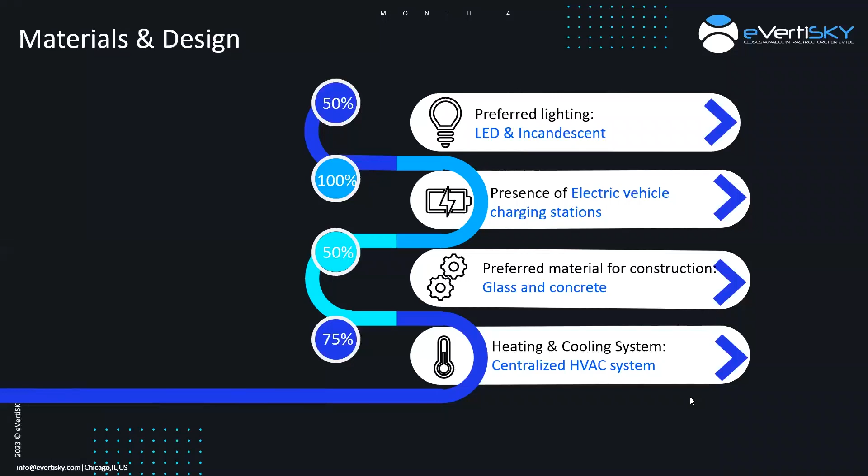And these preferences provide valuable insights for the design team for designing the terminal building and vertiports to meet the needs and expectations of users while aligning with sustainability goals. Next, please. There was also a unanimous agreement on the importance of rainwater capture and reuse systems, emphasizing the commitment to resource conservation and sustainable water management.

And regarding the exterior cladding material, 50% of respondents favored brick, known probably for its durability and aesthetic appeal. And when it comes to amenities, there was an equal preference of 21% for charging stations, restrooms, cafes, or information kiosks, indicating a balanced demand for these facilities.

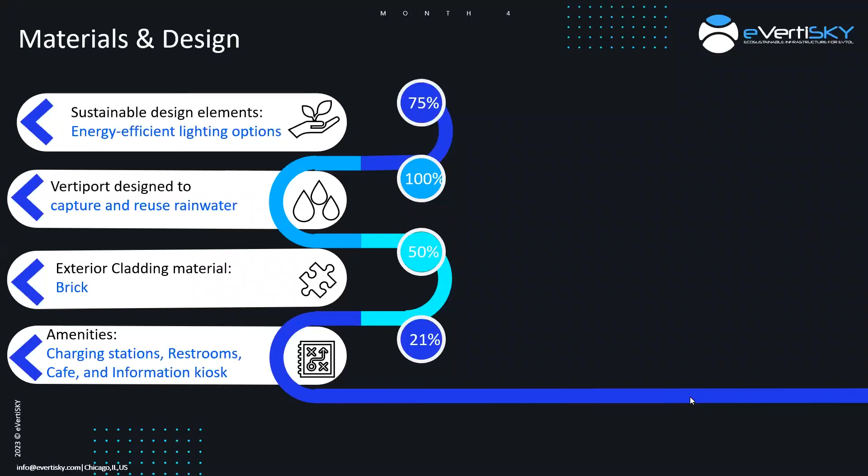And lastly, we have retail shops. The retail shops received a slightly lower preference at 14%, but still represent an interest in offering a diverse range of amenities to enhance the passenger experience. Next, please. Additional key design considerations for the terminal building and vertiports.

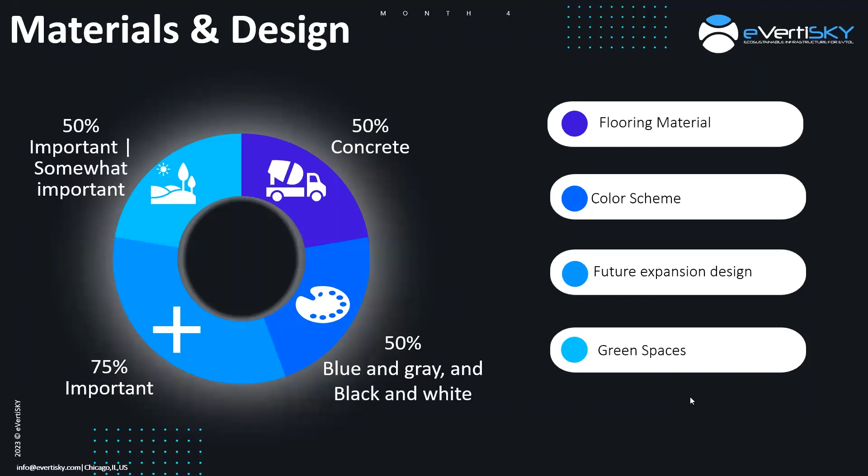We have equal preferences for blue, gray, and black and white color schemes, and this suggests incorporating elements of both for a visually appealing environment. And 75% of respondents emphasize the need for scalable design to accommodate future growth of the vertiport. Stakeholders value the inclusion of green spaces for an enhanced aesthetic and a refreshing ambience as well. And these insights inform the design team. It's really important to keep that in mind. The design team decisions, ensuring a functional, visually appealing and sustainable environment.

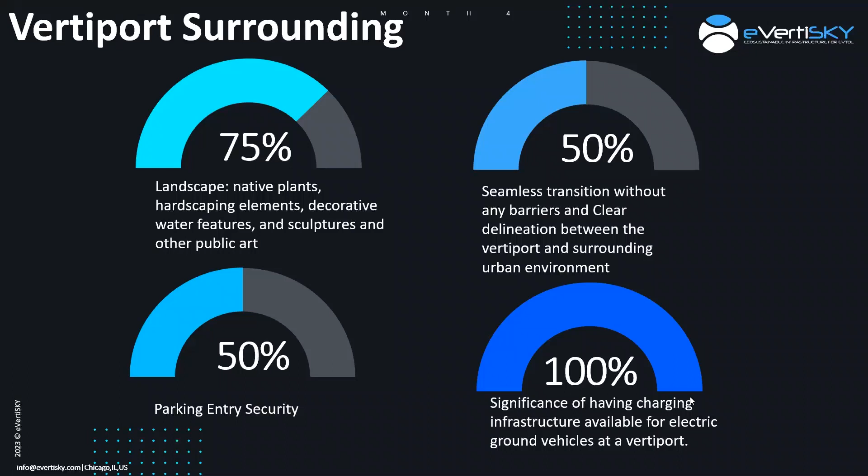In terms of vertiport surroundings, stakeholders emphasize the importance of landscape elements, safety measures in parking areas, and charging infrastructure for electric vehicles in the design of the terminal building and vertiports, and achieving a balance between integrating with the urban environment and ensuring clear boundaries is recommended. And these insights guide the creation of an inviting and secure environment within the vertiport. Next, please.

In terms of security, stakeholders emphasize the importance of comprehensive security measures and specialized infrastructure protections for critical assets within the UAM architecture. And it is recommended to combine security personnel, surveillance cameras, and access control systems to ensure optimal security. And the design consideration should include tailored protective measures for critical infrastructure, sensitive data, and advanced technology systems to ensure their robust security and safeguarding is in place.

And lastly, we have the operators. So stakeholders highlight the importance of providing dedicated space for eVTOL operators to conduct flight simulation and training at the vertiport. And this demonstrates their recognition of the significance of safety and competence in eVTOL operations. The design should include both indoor and outdoor training spaces to accommodate theoretical training, virtual simulation, and practical exercises, ensuring comprehensive training for eVTOL operators and enhancing their capabilities.

We are done with the survey. So I know you all have been waiting for the airspace structure phase. It's complex, but not complicated. So here we go. Today's points are going to give you a complete picture of what a UAM corridor might look like in the selected location.

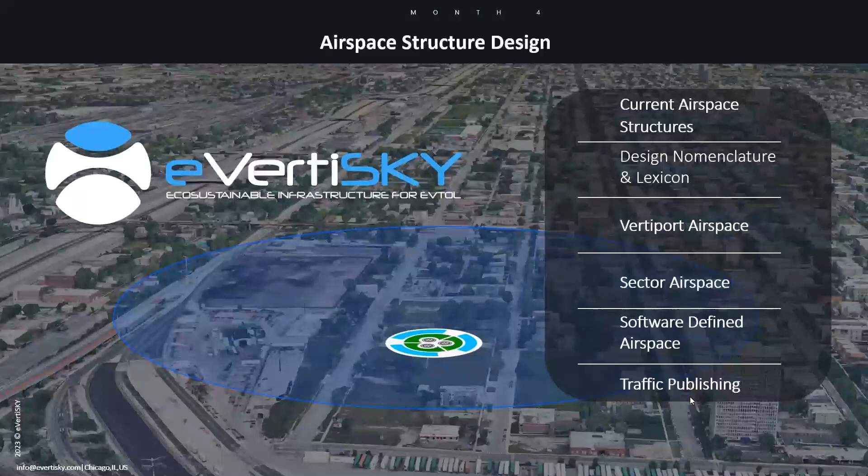So our webinar today centers on the current and future landscape of urban air mobility airspace. We initiate with a comprehension of the various UAM airspace factors, which include aircraft specifications, logistical considerations, and the existing infrastructure's capability with both airspace and ground space integration. Next, we will focus on the prospect of UAM-dedicated airspace. Here, we will touch upon innovative concepts such as vertiports, sectorization, and cutting-edge technologies such as four-dimensional trajectory-based operation and ground-based public sensing node system.

And moving forward, we will spotlight the software-defined airspace platform. This is a specially designed solution that efficiently manages UAM traffic. And following this, we will converse on transitioning towards hyperlocal functional airspace blocks to integrate UAM operations seamlessly. Next, please. So let's get started with the current airspace surveillance gaps.

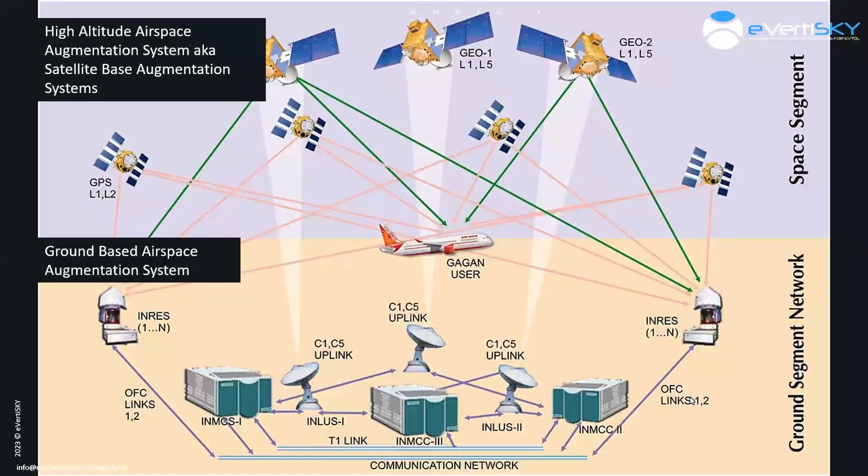So while the high altitude airspace augmentation system and the ground-based airspace augmentation system play significant roles in our current air navigation infrastructure, they present certain challenges when applied to the new dynamic of UAM environments, particularly in managing commercial low-altitude traffic. And existing radar and satellite systems are not optimally designed for the UAM ecosystem, as they present limitations in aircraft surveillance.

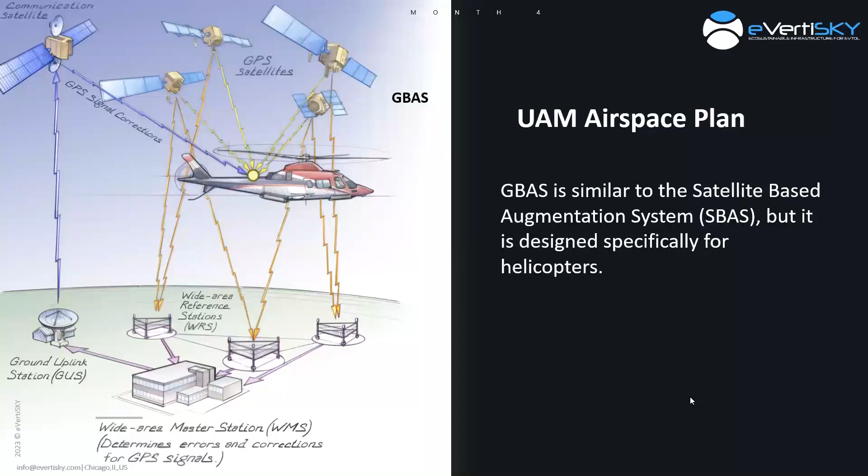So one current consideration is the use of the ground-based airspace augmentation system. So while the ground-based airspace augmentation system is suitable for the diverse flight paths and low altitudes associated with helicopters, it may not fully meet the requirements of UAM traffic surveillance. And here is why.

So in the current commercial aviation framework, flights to and from airports are managed using a combination of air traffic control services and airspace management procedures and technology. While the specific techniques may vary, here's a general overview of the process.

So when an aircraft is ready to depart, it obtains clearance from the ATC tower at the departure airport. As the aircraft ascends, control is transferred from the tower to the appropriate en route ATC facility. And as the aircraft nears its destination airport, it enters the terminal area. And arrival procedures involve coordination between the en route ATC and the ATC tower at the destination point.

Radar systems at the destination airports and ATC facility track the aircraft position and provide continuous surveillance during the approach. And those systems can see an aircraft from 30 to 50 miles away, and that's because of the altitude of the aircraft.

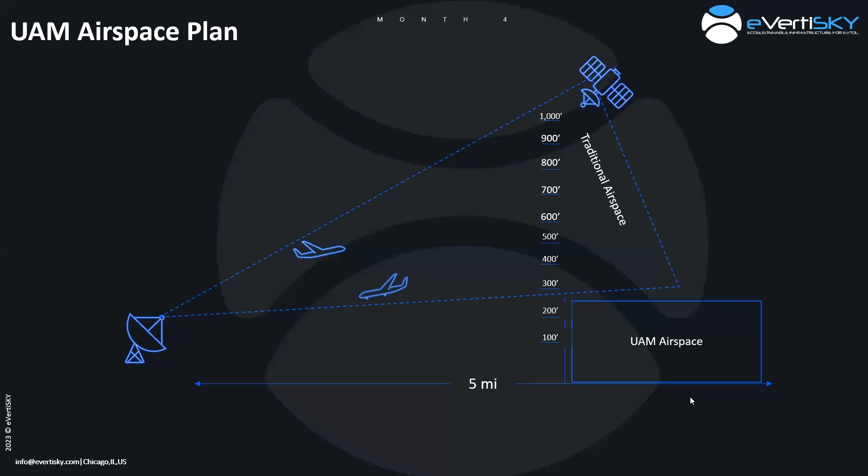Thank you. So in traditional airspace, I can see an aircraft either with my ground-based radar or my airspace satellite, 30, 50 miles away, depending on the placement of that radar. With the UAM ecosystem, it's common for UAS to be prohibited from flying within about 5 miles of the airport.

Now, the reason why those airplanes are seen by those traditional tools has to do with the proximity of those tools and altitude. So if I can remain in an altitude within the zone of sight of those tools, I can be seen. With a UAM aircraft, the closer I get to the airport, the lower I'm going to fly, and that's not the same as flying into an airport.

But if there is a delivery to be made, or a passenger or a cargo transit within the controlled airport, the UAM aircraft will be beneath that airspace. And let me show you what I mean. So you have the facility map, which shows no flight zones for urban air mobility. Let's call it drone vehicles at this point. It's 400. And as you get closer to the airport, the drone altitude has to decrease.

So the FAA recommended a hockey puck type structure around the drone, roughly 250 feet above vertical airspace between manned vehicles. And depending on the UAM aircraft altitude, this will create a 500 feet tall hockey puck. And also 2,000 feet between the aircraft, so tip to tail. So through that zone, you have that much of a buffer.

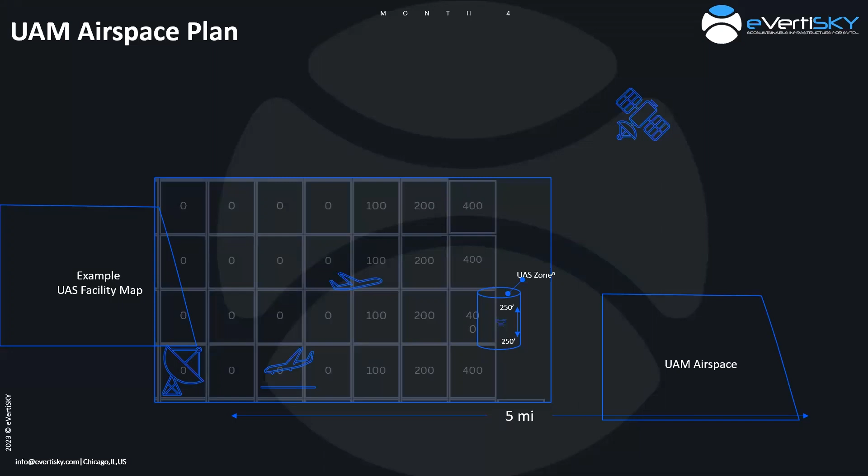So there is a real issue with regards to the current system's ability to see and surveil aircraft, and that's the real component of safety that we depend upon in traditional aviation and airspace.

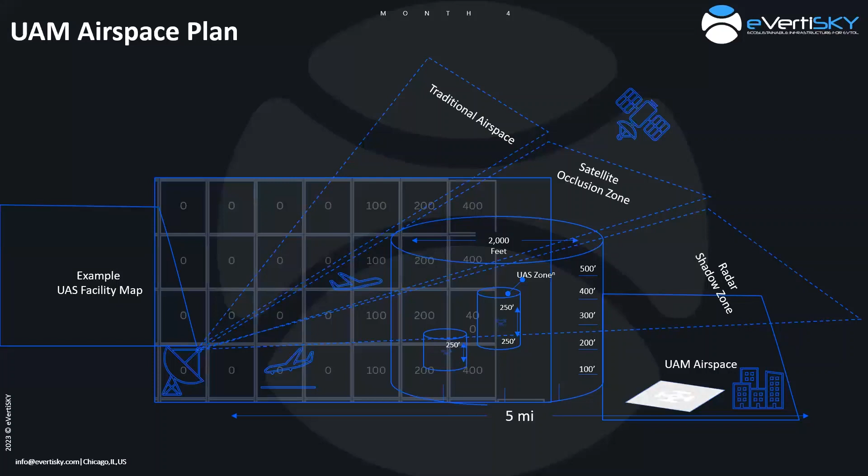So let's talk about these issues. We looked at them for years, and the NASA Dallas-Fort Worth use case with Joby really fleshed out a number of different points. We rooted them in these 6 points here, and they're all based on radar and satellite concerns. These concerns form a set of fundamental shortcomings that are primarily linked to the low altitude and shorter flight routes characteristic of urban air mobility.

The root problem emanates from the inability to establish or maintain initial radar identification within the ATC system, leading to a loss of sight of UAM vehicles. So in essence, UAM exposes substantial operational safety gaps in airspace over cities. And as we envision denser flights and increased aircraft volume in the future, these challenges are expected to become more pronounced.

So firstly, we address the issue of radar shadow, and this pertains to regions of airspace that radar cannot detect, creating a blind zone that aircraft could potentially exploit. And maintaining visibility and control over UAM vehicles becomes a challenge due to these radar shadow zones, intensifying the complexity of UAM traffic management.

And secondly, we face the impracticality of the traditional radar separation requirements in the UAM context. The conventional standard of 1.5 miles lateral or 500 feet vertical separation for departing or arriving flows doesn't accommodate the unique low altitude and granular nature of UAM flights. And this makes the current separation protocol less suitable for UAM operation.

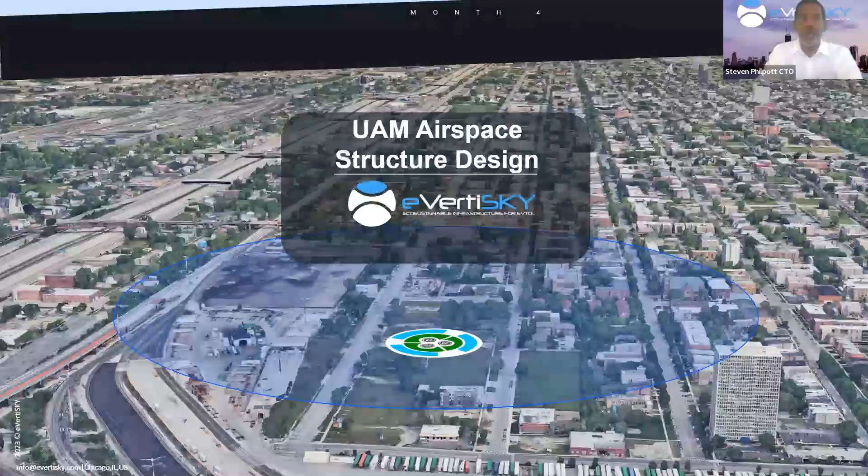What we wanted to do was be able to capture these types of data points in our design and then digitize them for a new approach. In doing that, we decided to develop the nomenclature, which is essentially the definitions for all of the places and things and activities that will occur within a UAM airspace structure.

In the context of software-defined airspace, which is our own approach, we're looking to use the nomenclature as a system of naming and terminology to standardize the various components of a software-defined airspace unit and those entities and concepts within the framework.

So what we have is essentially vertiport airspace structure definitions, the actual airspace structure sector, the broader sector in which it sits, the corridor structure, so that's basically how to get in and out of those software-defined airspace structures, and the route types. What are those route types going to be? And the zone types, along with what we're looking for to encourage deconfliction and traffic management. And then we look at the broader area in which those aircraft are going to be traversing.

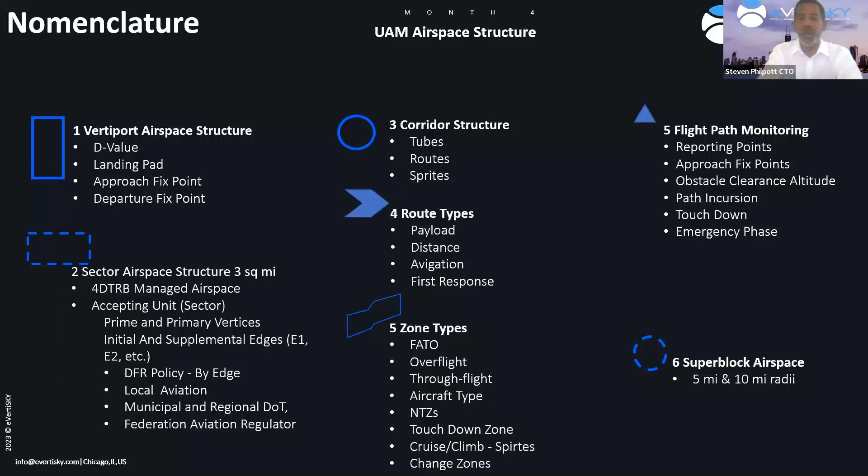We also look at developing a lexicon. Let's call the lexicon the base of knowledge of relevant objects that refer to the object's characteristics. Each one of these are essentially placeholders for the identifiers and characteristics of those objects. The goal is to provide a standard lexicon to grow with the robustness of the UAM industry and provide a reference for that growth over time.

Within our approach, we define the lexicon to capture information like the sector layers themselves, the digital twin of that sector in which we fly, the digital rules of flight within that sector, and publishing of that information to the relevant tenants of that UAM ecosystem.

So let's talk a little bit more about the actual urban airspace. Just to take a step back, everything that Sandra said mentions that the existing traditional airspace system is going to have a hard time being retrofitted to accommodate the new type of vehicle.

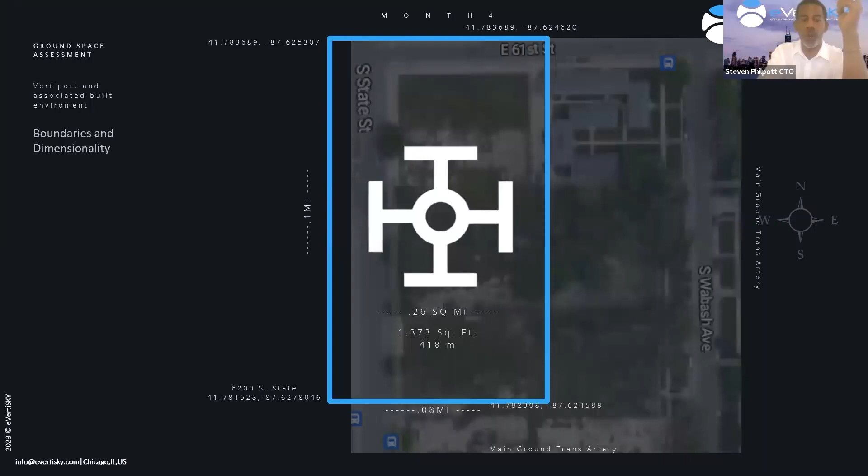So let's talk about our proposed location. We're at 6200 South State in Chicago. We captured a bunch of information to determine where that location is and what our route capabilities were, as well as the actual sizing of the vertiport. For that vertiport size, we took into account the dimensions of the vertiport itself, but we want to establish what we call the D value. That's essentially the airspace that is significant to the operations around the airport, the boundaries and dimensionality of that vertiport.

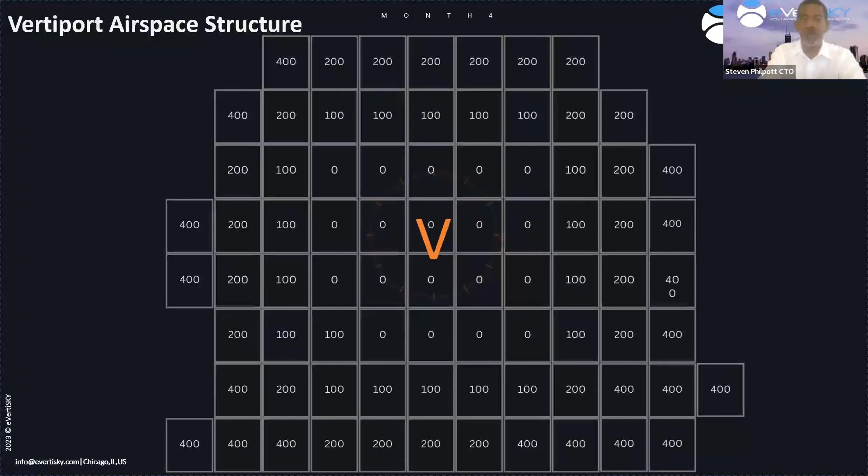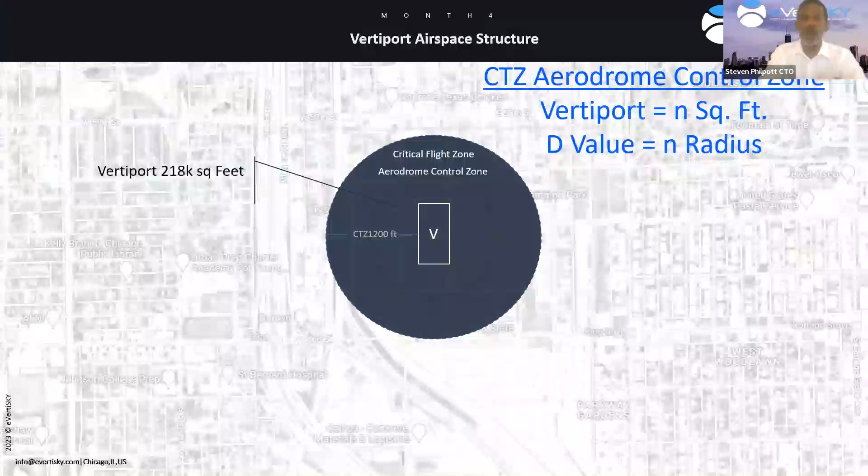And so we have taken the same approach of using a UAS facility map to step out the altitudes, the maximum altitudes of aircraft entering those zones, to provide that basic standard of protection. Then we drew a circle around the vertiport to define that maximum area. We're going to call that the critical flight zone, or the aerodrome control zone. It's our vertiport's sensitive flight zone. We're going to say, for example, that is 1,200 feet. There are no obstacles. There is clearance from the vertiport out to 1,200 feet.

And then we look at that sensitive zone around that. That is the exiting of the critical flight zone of that vertiport into the Class B airspace. It may be beneath it. It may be entering into that airspace. But we want to define that area as the D value of that sensitive space to get the vertiport's true D value of about 1 mile.

We also want to look at various angles of approach to get in and out of that critical airspace and the sensitive airspace. It's a little wider on airports because of the flight characteristics of the manned aircraft. Since all of our aircraft will be vertical takeoff, we looked at the best possible and most efficient way to enter and exit those zones.

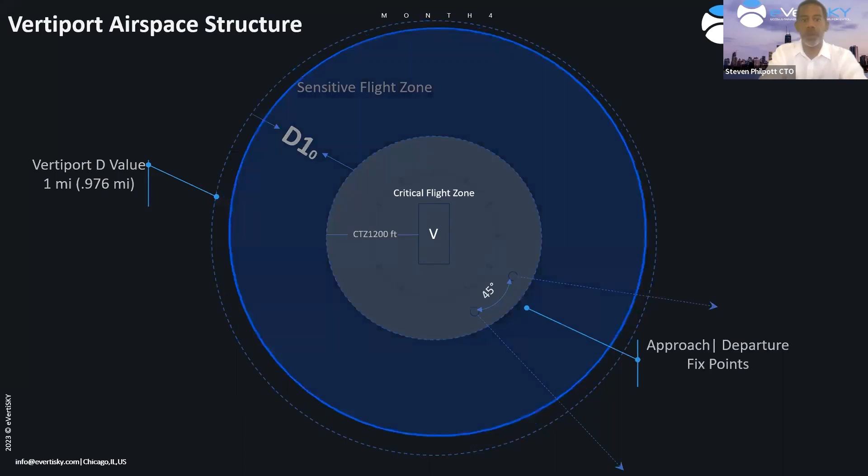In traditional airspace, there are fix points. An approach fix point is a designated location on the ground, if you will, used by the pilots to initiate a final approach. So you've got approach fix points that are typically a few miles from an airport and designated on your aeronautical chart by a symbol.

And then of those type of points, obviously you've got initial approach fix point, then you got a final approach fix point. Let's say that initial approach fix point is outside, just entering the sensitive zone, where that final approach fix point is that area where you're actually coming into the critical flight zone. And this would be the point in which a pilot or the operator would encounter communication with the traffic management system to acknowledge their position and indicate their final approach and descent into that landing area.

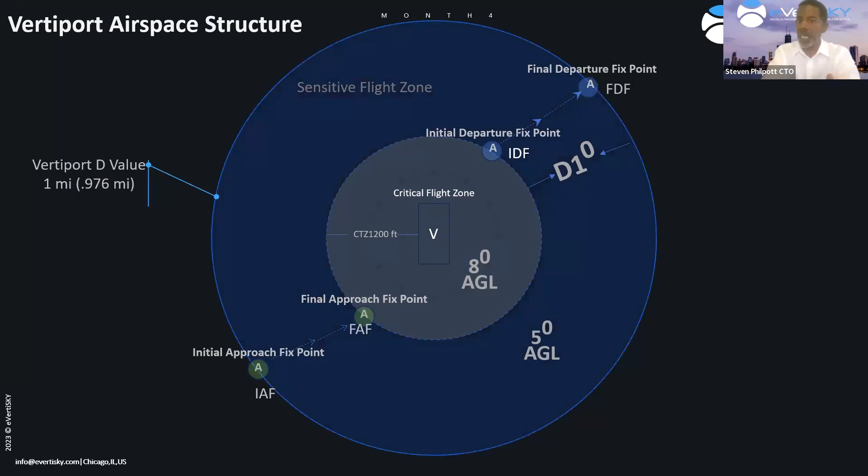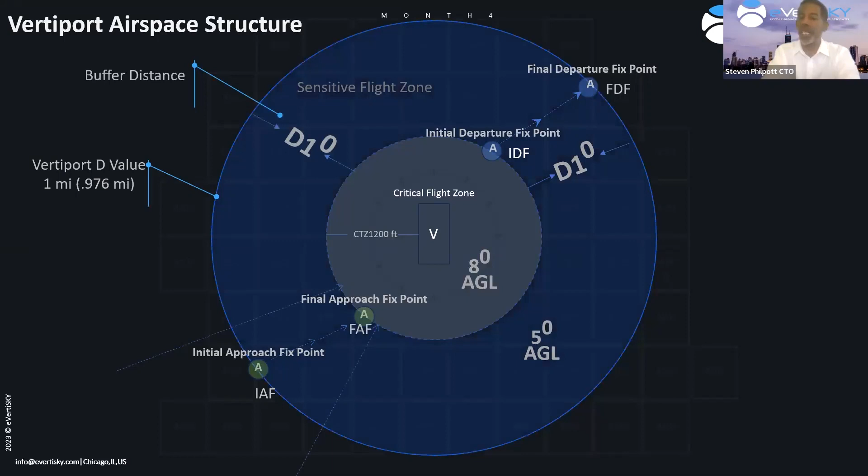So by capturing all of these data, we're able to create a clear snapshot of the footprint that has the activity directly related to the vertiport itself, right? So just like the aeronautical chart, we will need to present these types of areas with these types of data in an analog fashion. Our approach is to bring that approach into a digital communication structure.

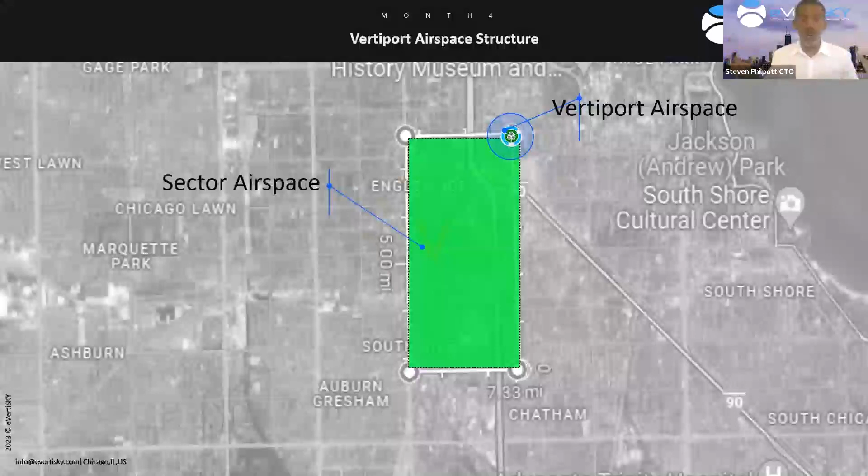Now, the second thing we do is look at the sector airspace, right? So in our area in Chicago, we are looking at the broader mileage around or from the vertiport's airspace. In our standard, we consider our minimum sector size to be roughly a 3 square mile area. Some of these indications on here may not depict 3 square miles because one of the tenets of the project that we're looking at actually extends that sector a little bit further. But for the sake of our basic design, we're looking at a 3 square mile area around the vertiport.

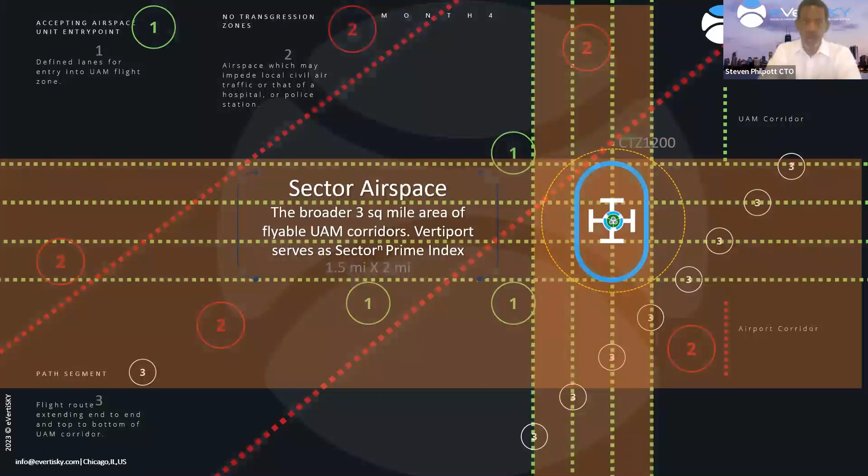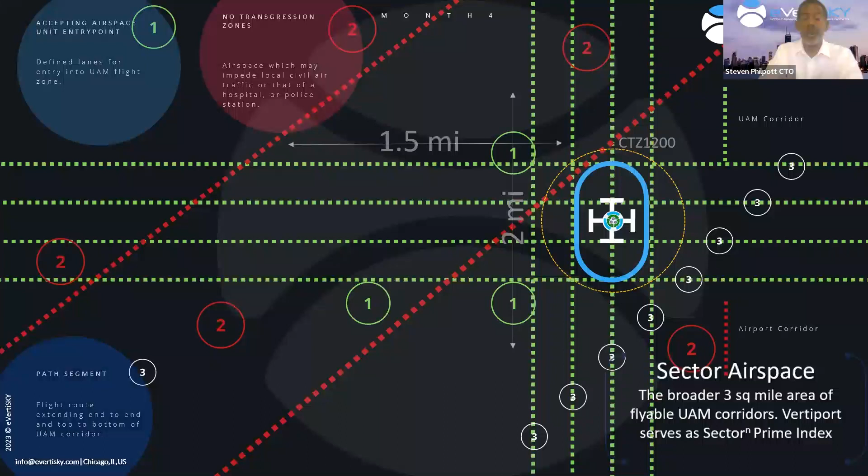And our true goals are really 3 things. And they are to look at the accepting airspace coming into the area, look at the no transgression zones that are all around, within, and external to the area, and then identify those path segments to get you in and out of those areas efficiently.

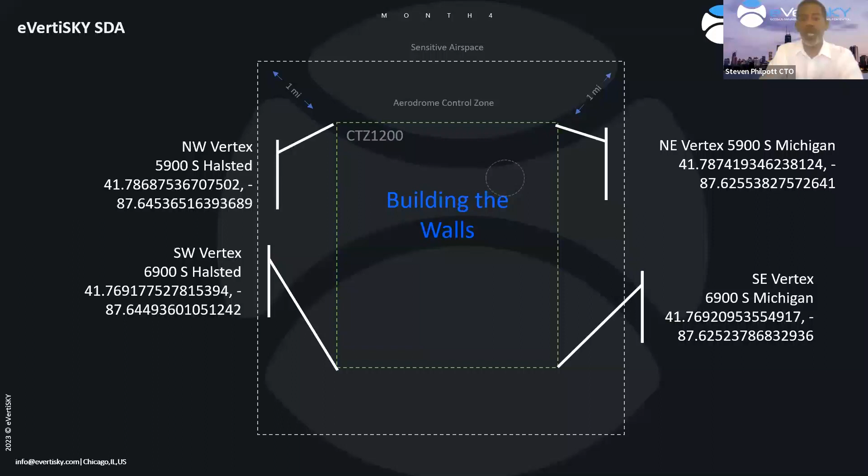So taking the same approach where we're looking at the vertiport airspace and the sensitive area of the airspace, we're going to first build the walls of our software-defined airspace platform for this particular sector. We're going to take that information from the vertiport's D value, and we're going to create a square mileage and then label the vertex or vertices, the 4 corners of the sector with the longitude and latitude. This gives us the characteristics by which we can identify the area. The process for building the walls is really the two components: define the geographical boundaries and establish the altitudinal limits.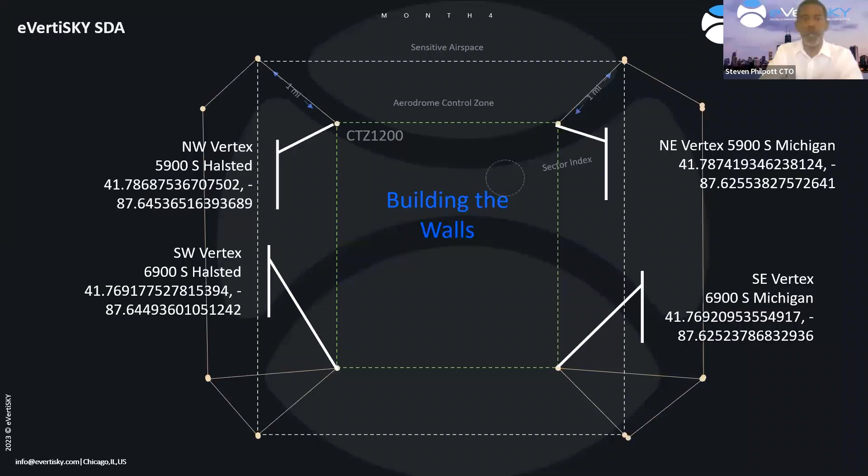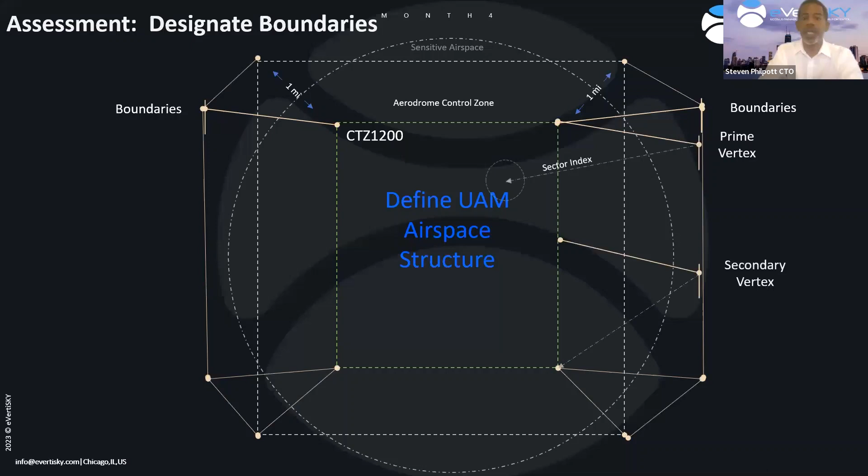So the sector index, that is the main corner of our sector, is going to be that vertiport. So you see this here, this is the main corner. That's our primary vertex, right? And that's going to be used to give us reference points and waypoints for the entire sector. We also create secondary vertices to identify other waypoints, midway points, and distances across the XY axis of the software-defined sector, or as it's often referred to across the pond, a functional airspace block.

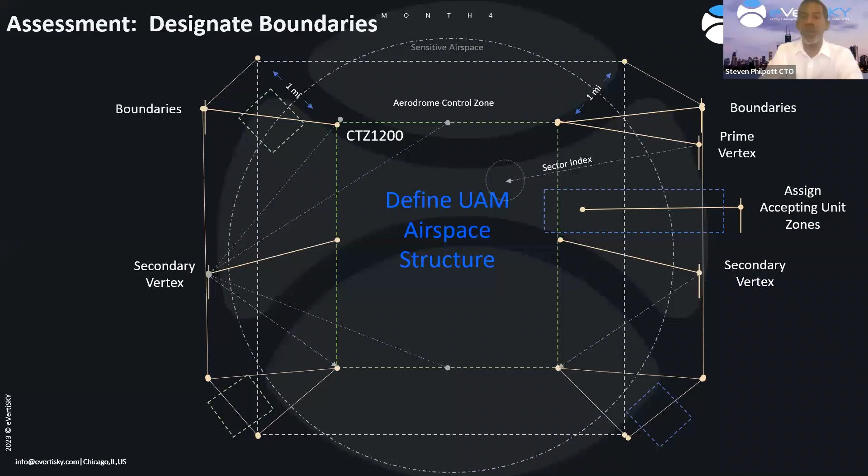In doing so, determining these primary and secondary vectors or vertices within our airspace block, we can now start to think about those accepting areas. So in traditional airspace, we know where an aircraft will report that they are a type of aircraft and that they're on approach. Well, we want to standardize those positions for each vertiport, primarily for safety and predictability. So at the end of the day, it gets pretty simple. You're either coming into the airport or you're exiting the airport, and we want to designate specifically where that is going to be.

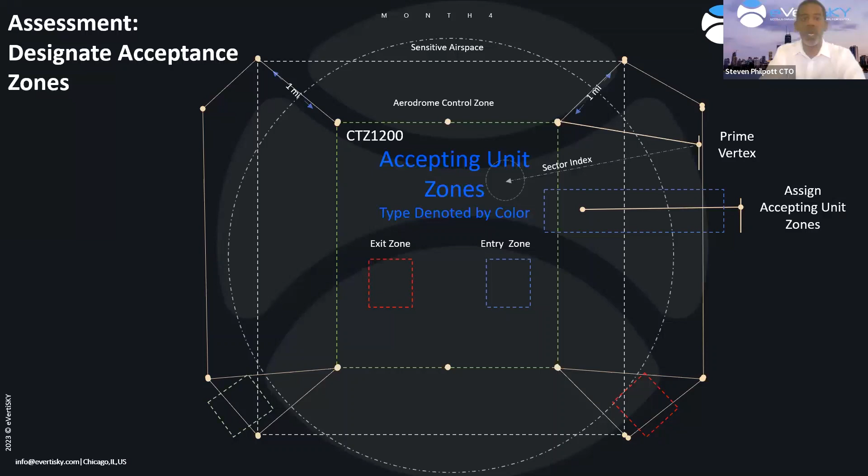In the European construct, these functional airspace structures or blocks are vital for reducing the airspace fragmentation. They're necessary to accommodate steady growth in traditional aviation traffic and to minimize delays more dynamically. So we mirrored that key element, the accepting unit, in our design for software-defined airspace.

Then we define the no transgression zone. So in traditional aviation, the NTZs are identified for obvious reasons, right? In our feasibility study, we still need to determine what specifically those areas are. They're comprised of really the airport control zone. These are all standard nomenclature items: airport control zones, prohibited areas, restricted areas, temporary areas, airway corridor restrictions. But overall, the ACZ is kind of our essential primary NTZ that we're looking at. It's the airport controlled zone of Midway. It has primary rights over our integration into that airspace.

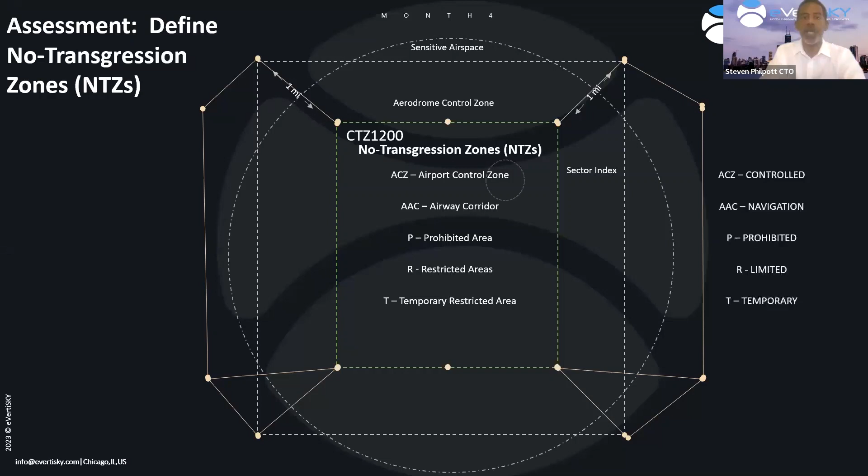So you look at the types of NTZs that are typical. We know that they're probably going to be our first responders, our good guys out there doing the hard work, as well as that airport. So we want to consider those zones primary NTZs and place them on our maps.

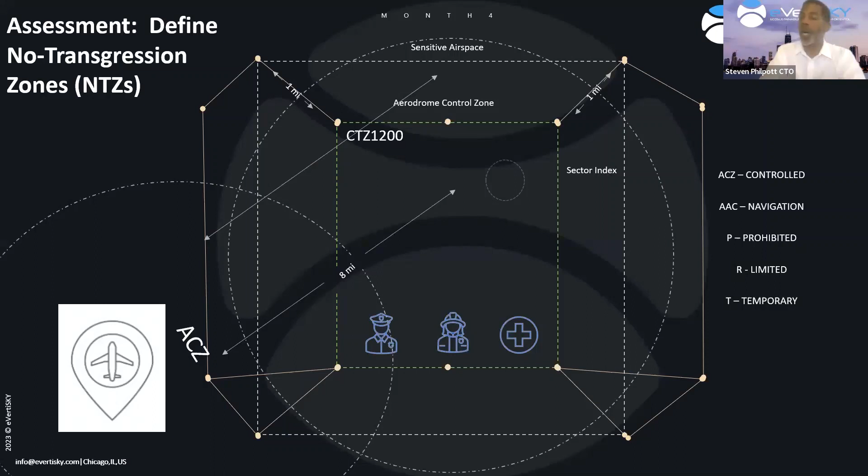Secondly, we want to put in those airway corridors so that we can identify where activity will occur and where those inflection points might happen for deconfliction. And those corridors are the airport's lanes of travel.

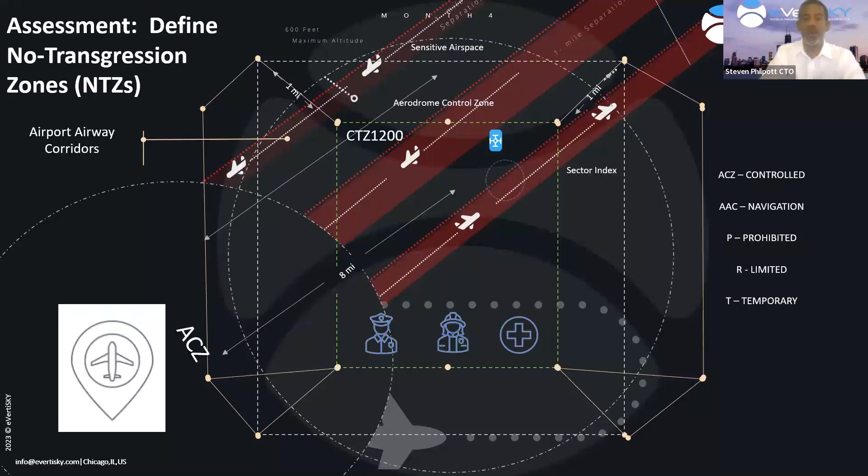When we originally designed the vertiport, or at least looked at the boundaries, we looked at the alignment with the primary airport in the area, which in this case is Midway. So what you'll see are flights that occur almost directly over our vertiport. However, we want to make additional consideration for our flight and the integration of those flights.

And so to define the lanes of entry into the UAM zone, we are basically going to look at the pathways, if you will. And the pathways consist of corridors that should be designed to maintain separation between the aircraft, manned and unmanned, and specifically looking at the mobility that would occur within the UAM sectors corridors and the air taxis, for example, that will be traveling to and fro and entering and exiting from the Class B airspace.

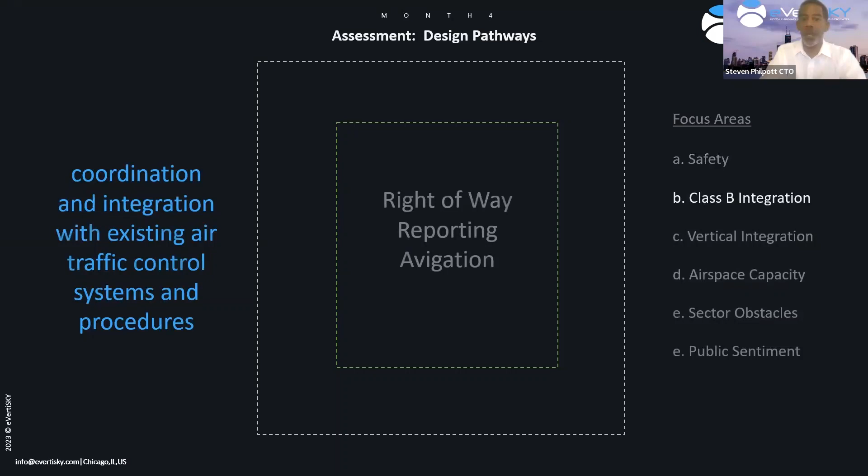So there are a number of factors, basic factors that we had to consider in design. The first, obviously, is safety. The second is the integration points and the right of way to get in and out of the Class B airspace, or at least the civil aviation airspace. That includes the vertical integration, the reporting points, and the clarity of the zones, the flight zones, what type of activity can occur. We want to also look at the airspace capacity and the potential traffic volume of that sector.

What is the planned capacity? What is the current capacity? What do we need to plan for? Is there an event nearby where the airspace traffic will increase and we need to augment our various deconfliction zones with additional algorithms at that point in time?

And then lastly, we want to look at the addressable policies and preferences of local UAM operations as considered by the public. Public acceptance is the #1 factor when being certified or allowed to activate these UAM sectors. So engaging with the public and local communities in the design process is what we've shown in our survey approach.

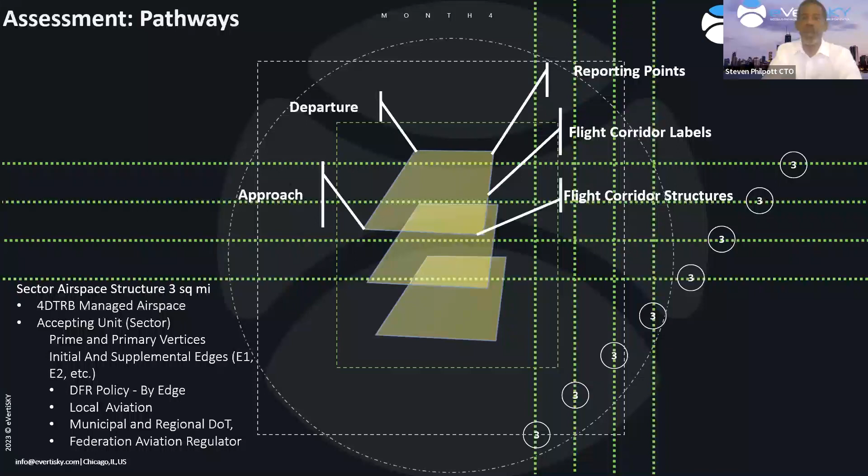And so developing all of these data points is integral to basically building out that data set that will report the information that will provide the ability for traffic management as well as dynamic deconfliction. Excuse me.

The digital flight rules approach in urban air mobility is supported specifically by our approach to software-defined airspace and its related technologies. The aim is to establish a robust regulatory framework that enables the safe and efficient coordinated operation of the system. But the rules need to have a layered approach, whereas the digital systems and the data exchange provide enhanced

situational awareness. They manage the traffic in a dynamic way, and they ensure it's compliant with airspace restrictions, local concerns, and definitely the concerns of the folks over whose heads they fly. This will ultimately foster true and effective integration of the UAM into the existing aviation ecosystems, as well as into a city's transportation operation.

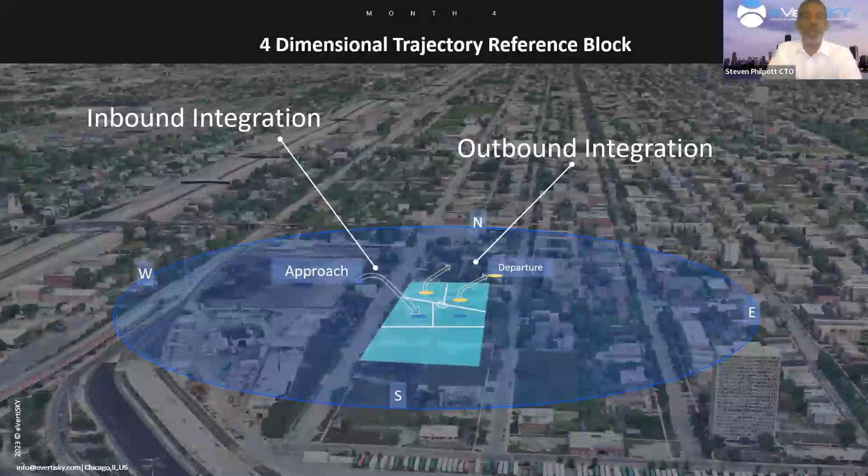The digital flight rules, our approach, we've developed the digital flight rules to take into consideration the inbound and outbound integration points from the UAM vertiport. The digital flight rules may identify the sector types to categorize and define the specified areas where the specific type of UAM operations can take place.

And the reason we went a little bit further to provide a systematic approach to capturing and publishing the digital flight rules is because they will vary most likely according to the altitudes. So in one level of altitude, you may have one type of activity, and another altitude, you'll have another type of activity. But at the end of the day, a special consideration is given to the areas with the highest traffic volume and the most potential incident points.

So these are the areas where UAM operations are going to be most concentrated, and in densely populated areas or in transportation hubs or specific regions, these things are critical. So for example, we said that overflight areas will probably account for 25% of the activity that occurs in a sector. And then a full 50% might be transversing in and out of the vertiport, a full 50%, right? So that's a real point of activity to be concerned with.

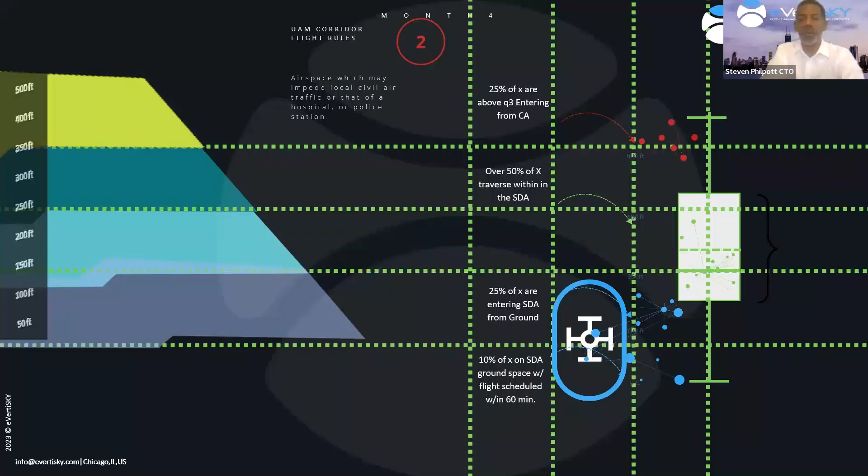The implementation of a system of routes is based on capturing the characteristics of the walls, right? We talked about those walls, or in technical speak, we're talking about the edges, those points between the vertices that extend up to a specific altitude, right? So in those walls, we have created those rules, and those rules will also vary on an X and Y axis.

Our ultimate goal is to capture all of the activity, movement, data that occurs within the UAM airspace block, or the vertiport operational block, for the basic reason of transportation management, but also to capture those touch points so that we can ensure the billing and revenue potential for the vertiport operator and the downline city that collects the taxes on this.

Everything that occurs within the airport sensitive airspace will be seen, but the 4D TRB, which is the brain of the system, truly is able to interact with 75%. And again, we said 75% is going to be that grouping of aircraft, manned or otherwise, that enter likely into that 500-foot layer, that 100-foot buffer over our sector.

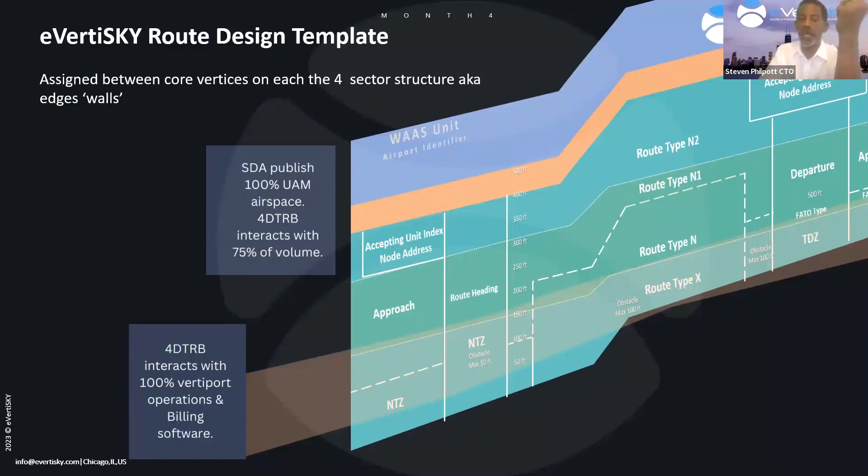So here's a depiction of what a notional functional airspace block or sector would look like with route labeling lexicons. So you essentially have that top layer, which is the Class B airspace, where a WAAS type system is going to be providing the surveillance of those aircraft in that space. And then you've got that buffer zone. After that buffer zone, you have our actual sector walls with their characteristics and their lexicon, which can hold information.

So eVertiSKY employs the zone and route labeling approach within the 4D TRB, which is the 4-dimensional trajectory based operational block, 4-dimensional trajectory operations box or block. Anyway, within the sector, it enables that sector to see those objects both on the ground and in the air, their structure, their characteristics, and this understanding of that entire playing field actually helps prevent collisions because it provides more predictability and ensures the efficient movement of the UAM vehicles.

It normalizes the flight standards to help identify the odd man out or bad actors. If we can make the aircraft routes and their activity within their routes standard, we can understand when things are not going well, and we can respond to that instead of having to identify that later.

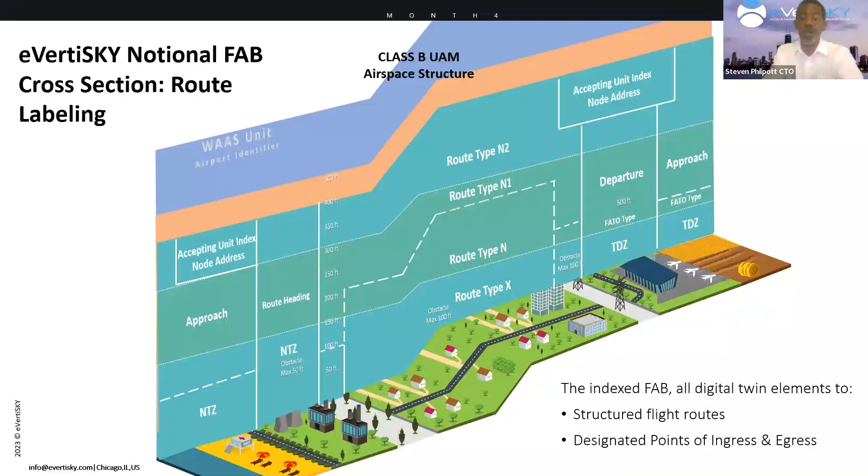So the use of the zone and route labeling enables us to enforce compliance with not just the regulatory requirements and operational guidelines, but the rules of airspace as put forth locally. And at the end of the day, different sectors, different cities, different vertiport airspace managers may have different requirements.

So the digital flight rules stack within our 4-dimensional trajectory reference block within the software-defined platform can be appended to include various additional parameters or other considerations like altitude restrictions, speed limits, noise restrictions at a given point, routing and waypoint guidelines. You would be able to insert weather and microclimate data, such as urban canyons, so the gusts that occur between buildings, and environmental considerations. And also special use airspace.

There'll be times where there's an event or a first responder situation in which that layer will identify, dictate, and publish what needs to occur. So you're able to add those layers in our software-defined airspace platform.

As I mentioned, we're developing the software-defined airspace platform using Chicago as a use case to provide a visual, digitally scaled down, demonstrable version of an active UAM ecosystem. And we've done this by implementing the functionality of this SDA kernel, the 4D TRB. And to visually represent the SDA-enabled sector and its geo-referenced points, we use ground-based sensing arrays to capture the airspace movement, as well as a secondary approach to capturing the ground space movement too.

So in capturing all this data, both the active data and the defined data of the sector, we want to cull it into a UAM data set. And we want to communicate that open UAM data set to the national airspace. So we'll publish our data set from each sector from a UAM sector cloud. So the mock feasibility study of Chicago, that location sector would have its own cloud, which would cull that sector data.

And as it's processed on the edge by the nodes in close proximity to the UAM aircraft, and then using our core member API with the NASA UAM or UTM, these data sets will be published into the NASA DIP for role-based authentication of us, and then exposed to the National Airspace System through the FAA. So at the end of the day, we want to offer this open UAM data set as a free data set that cities can use to provide this basic level of traffic management.

Now, eVertiSKY Group, ultimately, we're a for-profit company, and our approach is to use that open UAM data set and correlate additional data into more complex command data sets or navigation data that will take more robust machine learning and computer vision data and reasoning building blocks, to accelerate the refinement of operator service data within a UAM sector's ecosystem. So let's talk about that just a little bit more.

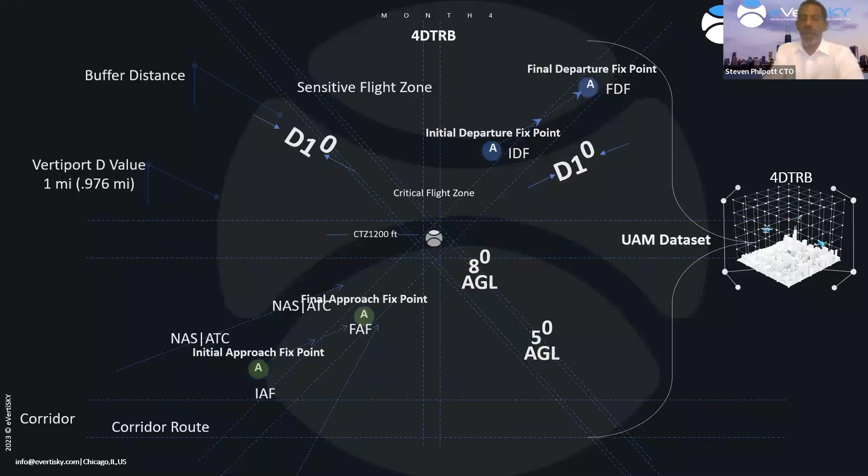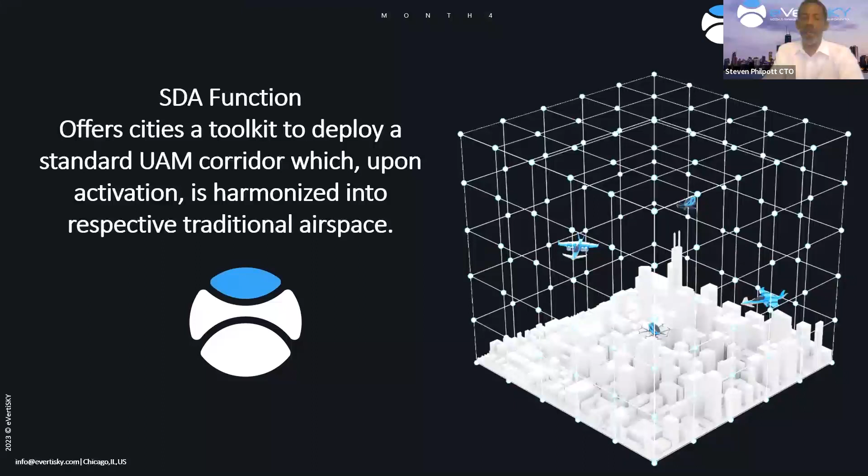The function of our software-defined airspace platform at the end of the day is just to give cities kind of a fingertip access to a switch where they can turn on their various sectors and have this safe harmonization of urban air mobility and the traditional manned airspace operation. To accomplish this, eVertiSKY integrates with the NASA DIP, Digital Information Platform, via that API interface I talked about. And this is where the flight data is fused and mediated, typically from multiple sources, such as the FAA's System Wide Information Management, or from airlines, their specific data and other sources themselves.

So in our way, the use of this NASA resource, the DIP, as well as their UTM resources, will assist eVertiSKY in development of low latency environments, the sectors themselves, and for enhancing the UAM data services, as well as shrink the capabilities gaps for cities to manage their own airspace, provide the benefits of UAM, and also generate revenues.

Okay. Where the UAM industry is, to be optimistic, we are somewhere around UML2 in terms of maturity level, where we want to be and what we want to provide. The software-defined airspace approach will provide the level of complexity to scale from UML2 all the way through very seamlessly to the full extensibility required from UML6, let's say.

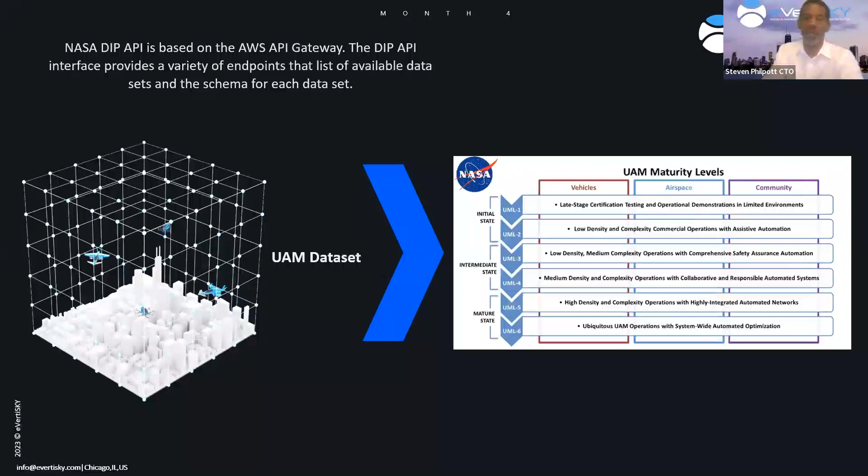We'll evolve our API towards the use of these NASA FAA machine learning ecosystem blocks, the catalog of their existing tools as a resource to introduce efficiencies, reduce the technical barriers that may be in place and NASA's already solved. And some of those resources that we've identified for use are their data storage system, where their fuser data is stored in relatively a fundamental RDS type of database.

Their machine learning ecosystem, NASA's developed a machine learning ecosystem in their cloud services, where we can access things like KPI reporting services, health monitoring of a sector itself or the aircraft in that sector, reusable prediction microservices to reduce the need for standard adaptations, as well as other services that may be available and provide the system a much more robust capability.

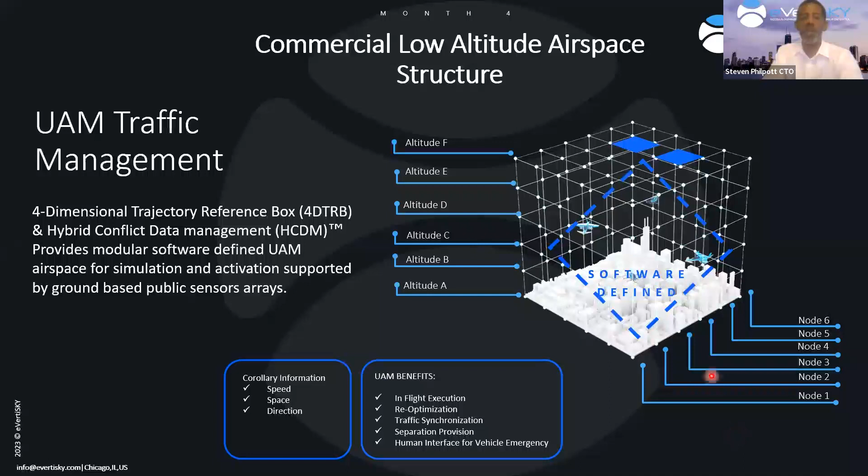So our traffic management approach is really based on that brain box, that kernel, the four-dimensional trajectory reference box or block, to provide this hybrid conflict data management system, capturing all of the data within that sector, assigning characteristics, and then publishing that information back out using all of its system capabilities. Folks have asked, well, if you're going to build a 3 square mile minimum sector, how do you connect these things?

Well, we do this through a data mesh strategy, and that strategy supports the seamless exchange of data between those sectors to coordinate safe operations. But we want to be able to show the contiguous UAM sectors, whether they're together or just the next sector. We want to be able to show those data points as defined by those geographies, right?

So sector 1 equals a number of geographies and a number of activities and a number of obstacles and objects. Sector 2 may have additional information. We want our strategy to offer a number of technical advantages, such as the decentralization of the architecture, so that a city itself now has its own picture that it can present, control, and store.

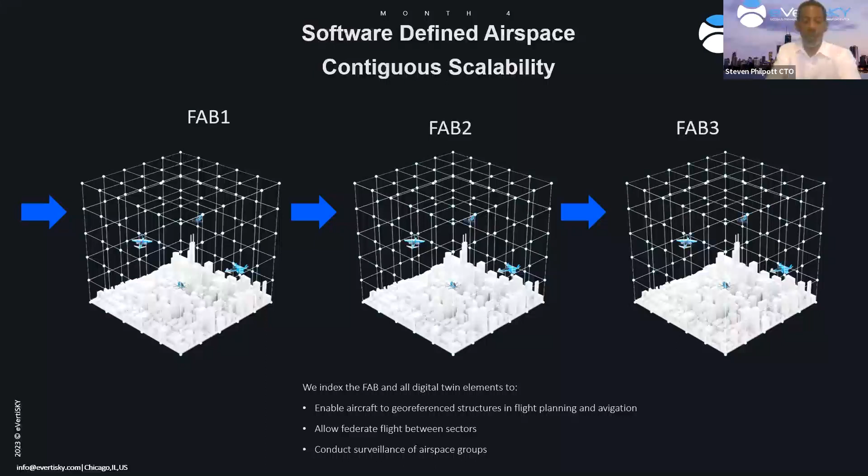You have domain-oriented ownership of this data, where a city or a vertiport controls that data and the efficient data discovery within that data, and the interoperability with systems that are connected with the National Airspace System, NASA's DIP, other UTM strategies, and then provide the scalability that we need for collaborative innovation in the future with other airspace operators, partners, and so forth.

So at our root, we are looking to focus on the basic use of some simple algorithms and developing and implementing advanced algorithms for aircraft detection, threat assessment, resolution advisories within the context of UAM, and take that core data that's being processed on the edge by our ground-based public sensors network and use these data in a way that takes the burden off of manned interaction.

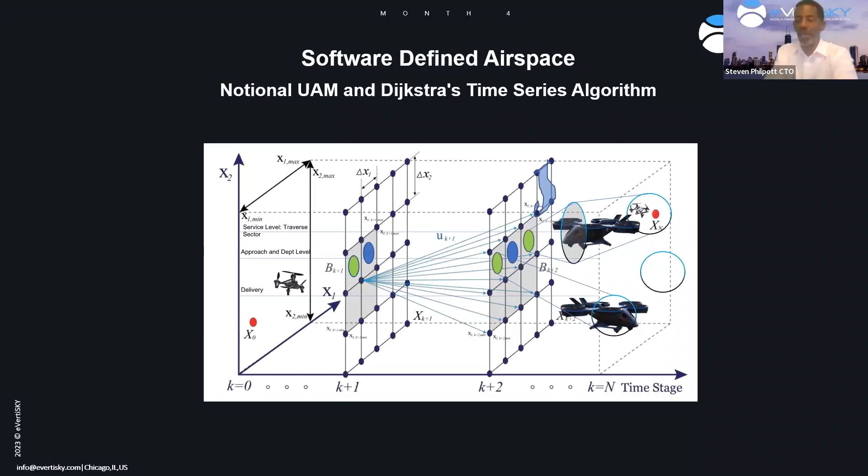So in this case, you see the example, we're using a best path algorithm, Dijkstra's best path algorithm, to go in and out of the sector. And so again, in that four-dimensional trajectory reference block kernel, we're gonna have all of these data points crunched down so that we have PNT data. And the PNT data within the SDA provides the information about the location, velocity, and orientation of a UAM vehicle at different points in time.

That's kind of it. At its core, that's the core data that is crucial for understanding the dynamics of a UAM operation. The open UAM data set provides a valuable resource also for researchers, developers, and other stakeholders in the UAM ecosystem to study and analyze the interactions between that PNT data, those objects that are moving, and provide more robust command instructions in the context of UAM operations, airspace mitigation, as well as just traffic support overall.

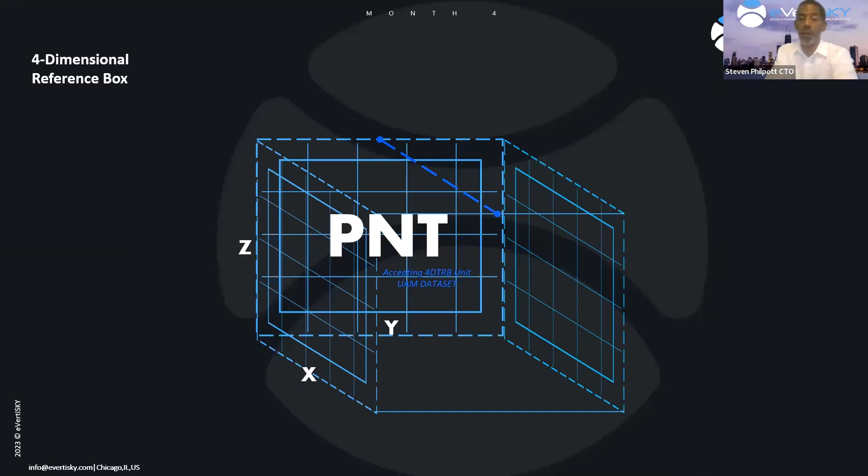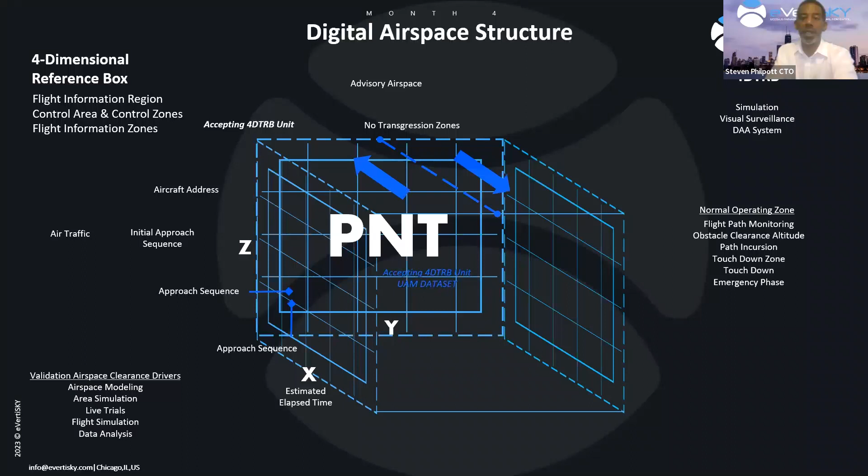So we take that PNT and then we look to build out additional data sets that are important to that ecosystem, right? So beyond where that aircraft is, we want to be able to do a number of additional complex things. At the true end of the day, publishing the information is where we excel. It's that integration between that city's 4D TRB, the regulatory environment, as well as the operating environment that allows the UAM ecosystem to flourish. So we look to a standard interface. We talked about the interface with the NASA UTM, the NASA DIP.

We want to provide a standard generic interface which allows the SDA to share data to UAM operations. We want to share things like flight data, the routes that are planned, vehicle trajectories as planned and as they are, airspace constraints planned and as they are, all things that will occur within a city's 4D TRB or their contiguous 4D TRBs. This exchange of information enables the city to incorporate UAM operations right away into their overall traffic management strategies and help with the balancing of traffic in their urban planning strategies moving forward.

With the constant data on each of those sectors, urban traffic just flowing all the time, including both airspace and ground space, we can capture a comprehensive picture that will, in no uncertain terms, lend to the overall safety that is required of UAM.

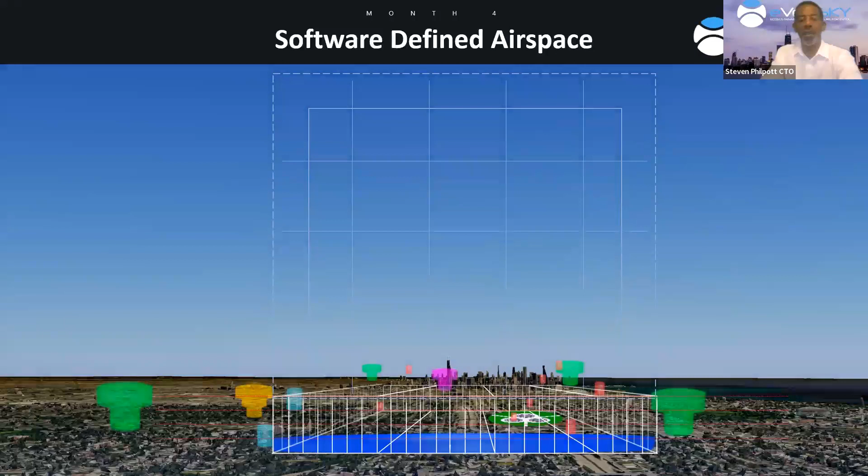So the SDA and the 4DTRB operating system represent a comprehensive platform for managing UAM operations within a city. It's as simple as that. It leverages the proven concept of four-dimensional trajectories, which support dynamic route optimization, traffic conditions, airspace constraints, weather, and operational requirements for the good of that particular sector of the industry.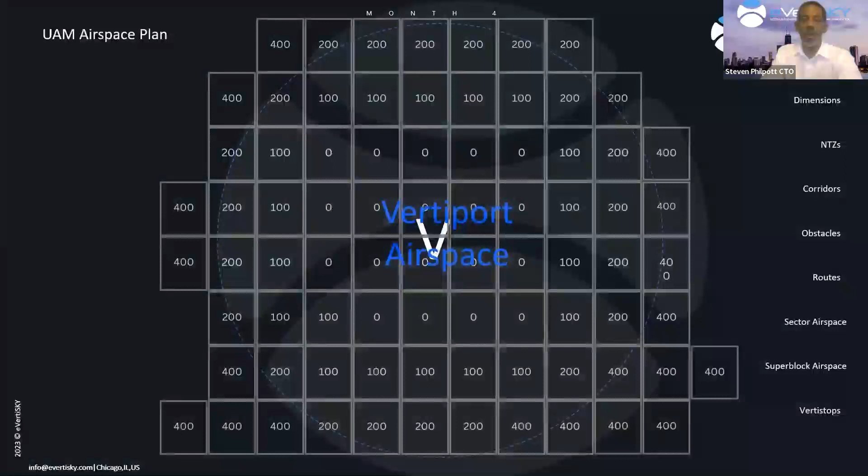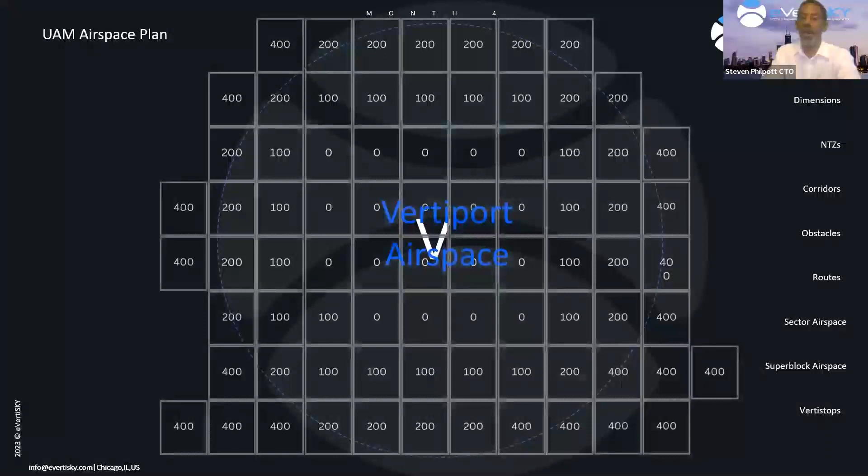Let's talk a little bit about the 4DTRB. By applying the SDA framework, the concept of avigation, which is really defining direction and rules, is extended into the integration of the commercial low altitude activity by those aerial vehicles. So this framework will play that crucial role in analyzing the airspace, but it also promotes the use of that airspace in a standardized fashion.

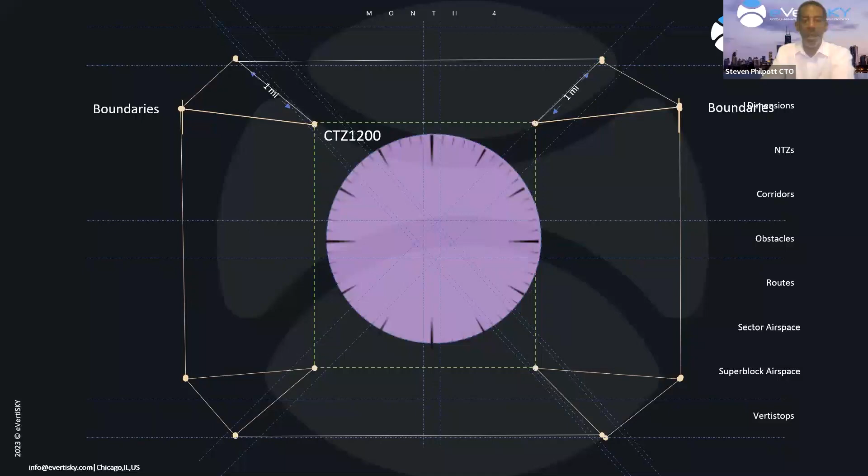So what we're able to do in our airspace design is employ those regulations and policies, traffic management, integration with the existing aviation system, infrastructure, and other safety considerations, and ultimately create what will be an analog version of a UAM aeronautics chart, which will basically give you all the information about the airspace over a sector.

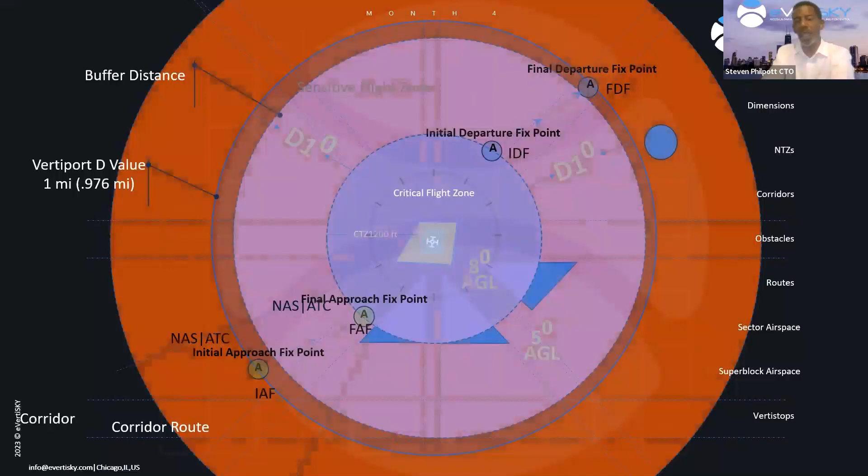The complexity involved in culling and correlating all of those data points that we've talked about is ultimately an infrastructure investment by a city, to be honest with you. But it will facilitate a range of air taxi and drone operations. So where that infrastructure investment may seem to be outside of the scope of a city's transportation management strategy, enabling eVTOL cargo movement, beyond visual line of sight flight and operations, truthfully, in dense urban areas is a win, is a huge win.

And what we wanted to do is give that ability to provide a visual representation. In our mock study, we will identify and label the main flight routes and the transition points. In this case here, the transition point we're calling a sprite, and it's the movement between altitudinal levels and into additional routes. And this is where those rules are applied.

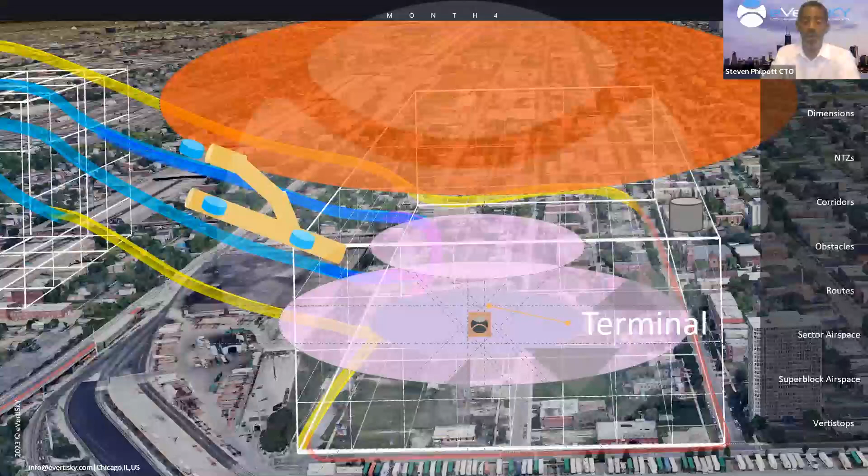So that's our approach to airspace design in our mock study. Those are the tenets of it. We didn't go real deep into the actual development of it, which is something that we would do on a one-off basis with our clients. But we certainly appreciate the opportunity to show this approach, and we have spent considerable time with our partners on what we think is an optimal platform for discovering the capabilities of UAM within a city, as well as activating UAM within a city.

Our 4DTRB, in our opinion, is the tip of the spear for cities to begin talking to operators about the footprint of their aircraft, the capacity of their aircraft, the environmental considerations, the precise trajectory preferences they may want to use, their noise profiles within different spaces, and they can talk about these things relative to specific ecosystems and not just in theory.

So we are happy that these architectural components create a robust framework that supports the safe, efficient, and sustainable integration of UAM into a city's airspace. And we are thrilled to have the participation and support of our partners globally to effect the development, testing, implementation, simulation, and deployment in cities around the world.